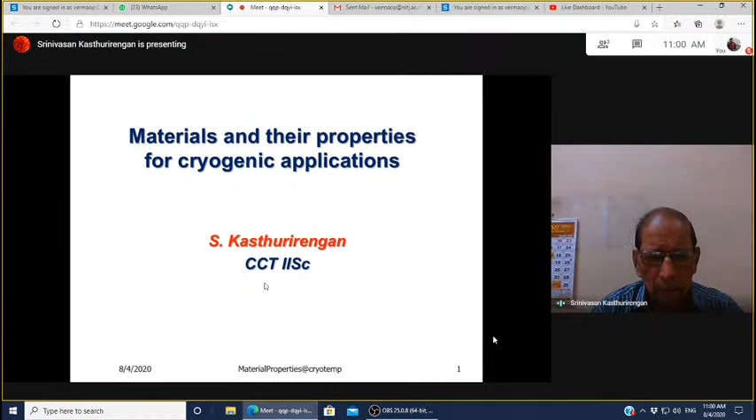Okay, thank you. I think yesterday we had a talk on the introduction to cryogenics, its fundamentals and applications. And today we are going to discuss the materials and their properties for cryogenic applications.

Like yesterday, the plan of my talk is something like this. There are a lot of materials used at room temperature. When you take them to cryogenic temperature, there are a lot of issues and they cannot be used, so we will see some of these issues. Then, which are the suitable materials for low temperature, and which are unsuitable? We will segregate this.

Then we'll move on to the properties of materials at cryogenic temperatures. We are aware of several properties, and the main important ones are thermal expansion, mechanical properties, and transport properties. In transport properties, we require to study specific heat, thermal conductivity, electrical conductivity or electrical resistance, and lastly, superconductivity.

The program being organized is on composites, and composites have a lot of applications in cryogenics. Please pardon me, I am totally new to composites, so please bear with me when I present that portion. But I would like to introduce a little bit about composites and their use in cryogenic applications. At the end of that, we'll conclude this talk.

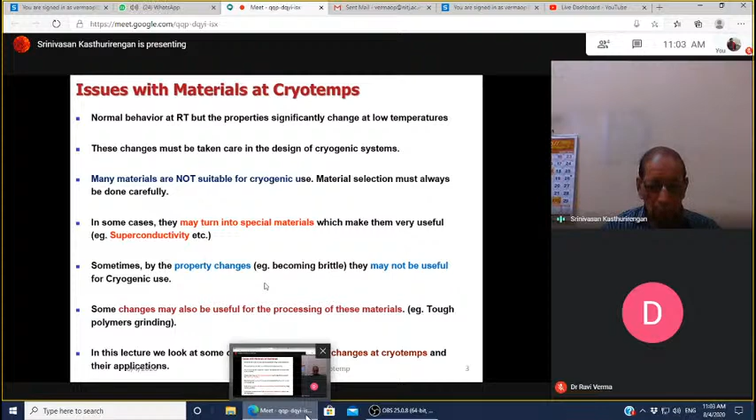Some changes of these materials themselves become useful for processing the materials. For example, if you take either rubber or tough polymers, you cannot grind them at room temperature. The only method is to use cryogenic grinding, cooling them to liquid temperature, then you can grind them without any problems.

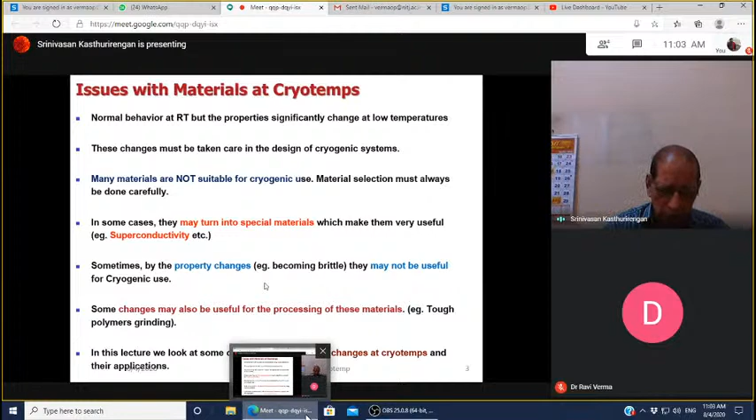So what we are going to do in this lecture is look at some of the material property changes at cryogenic temperatures and their applications. Okay, let us look at material selection at cryogenic temperatures.

Now, which are the suitable materials for cryogenic use? Let's see. For example, austenitic stainless steels, AISI 304, 304L, 316, 321, and low carbon type steels can be used. Aluminum alloys, for example 6061, 6063, 1100, etc. Copper is a very useful material for low temperature, especially for fabrication of heat exchangers.

There is also oxygen-free high-conductivity copper, called OFHC copper, used for very low temperature applications, particularly when you want minimal temperature gradients. You can also use phosphorus deoxidized brass. Niobium and titanium are also very frequently used. Titanium is a very tough, lightweight material, so it is used.

Niobium is used for superconducting RF systems. Niobium becomes brittle at cryogenic temperatures, but one has to design the system properly so that it doesn't become brittle.

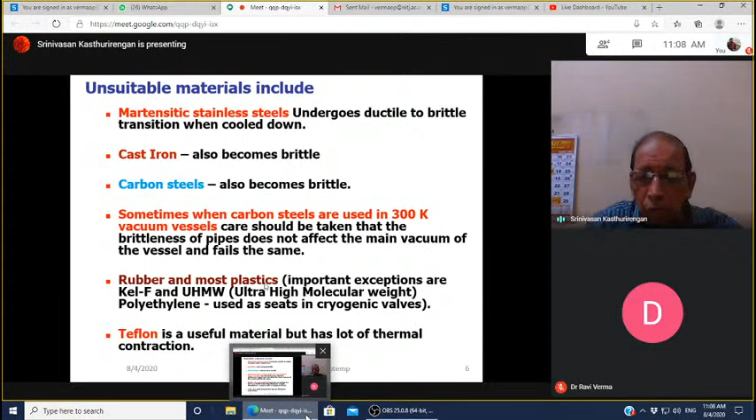Okay, let us go into the material properties at low temperatures. First we will start with thermal expansion. I will be using the terms thermal expansion and thermal contraction. Please remember thermal expansion takes place when a material is heated from low temperature to high temperature, and thermal contraction takes place when the material is cooled from room temperature to low temperature. So there will be some interchange of these terminologies, kindly bear with me.

Large thermal contraction can occur when materials are cooled to cryogenic temperatures. This leads to, for example, impact on the alignment. Suppose you have aligned some windows - if there is thermal contraction, the alignment may not be okay.

For example, including a simple transfer siphon, the inner part, if it contracts, then it goes away from the center of the tubes. So this has to be taken care. There will be development of interferences or gaps due to dissimilar materials. When you are actually fabricating, you should make sure that by the thermal contraction, they don't open up.

On the other hand, it should be the other way - it becomes closer in tolerances and causes a lot of increased strain, and sometimes it can fail. And sometimes it can also cause impact on the wiring.

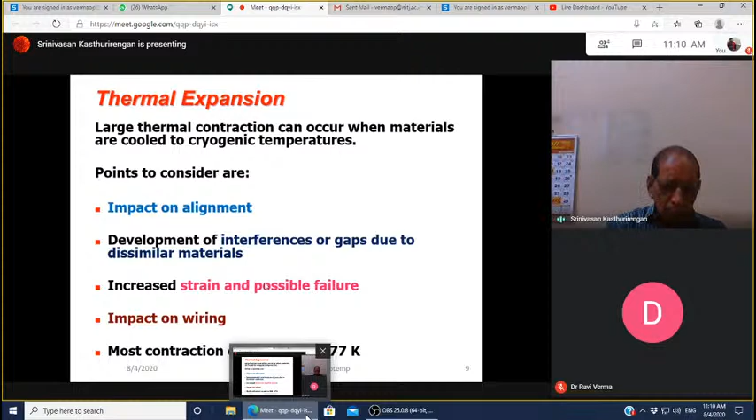Let us understand how the thermal expansion really takes place, or thermal contraction really takes place. Alpha is actually the thermal expansion coefficient, which is denoted as 1 by L into delta L by delta T. L is the length of the material, delta L the change in the length for a given change in temperature. Delta L by delta T refers to that.

Now, thermal expansion is caused because of the following reason. Suppose you imagine a well-arranged atomic structure - for example, let's say we'll think of a metal. All the atoms are arranged very nicely, at periodic, there is a very good periodicity of the alignment of atoms. Let's consider only two atoms which are very close by.

Let's look at this, for example. This is at a very low temperature. Here we are moving it further. At low temperature, the atoms do not vibrate about the mean position, or the vibration amplitude is extremely small. Then as you keep increasing the temperature, the atoms vibrate in their mean position. But what happens is, because of the anharmonic component of the potential, the distance between the atoms keeps moving out. So there is an expansion taking place.

So at higher temperature, there is a large amplitude of the oscillation of the atom in its position. Also, the distance between the atoms are increased. So this is the real cause for thermal expansion in materials.

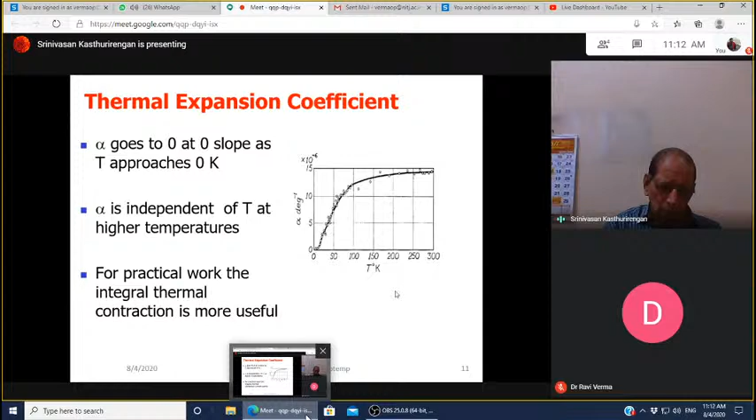Let's proceed. The thermal expansion coefficient itself goes to zero at zero slope as the temperature approaches 0 Kelvin. Actually, the thermal expansion coefficient is independent of temperature at high temperature. You can see the graph on the screen, which shows the thermal expansion coefficient is nearly constant at high temperatures. Now, for actual practical work on the cryogenic temperature range, what we need is the integral thermal contraction or integral thermal expansion coefficient.

Let's look at the integral thermal contraction for different materials. The delta L by L from 300K to 100K in the first column, and then delta L by L from 100K to 4K in the second column. So different materials' values have been chosen here - for example, stainless steel and copper, aluminum, iron, invar, brass, epoxy, and titanium, etc.

What you notice is, for example, stainless steel has a thermal expansion coefficient of 296 into 10 to the power minus 5 in the range from 300K to 100K, whereas it's just about 35 into 10 to the minus 5 in the range from 100K to 4K. Similarly, most of the materials have the same behavior.

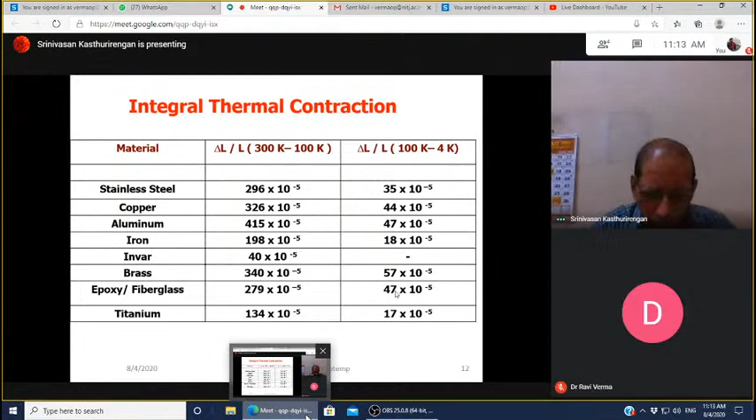Now, you may remember yesterday that we showed a video in our first talk relating to shrink fitting. Actually, the thermal contraction becomes very useful for making a proper joining between two dissimilar materials. For example, you can think of joining brass with copper, or aluminum with brass, and things like that. Yesterday on the video, we saw an aluminum stud inserted into a brass hole.

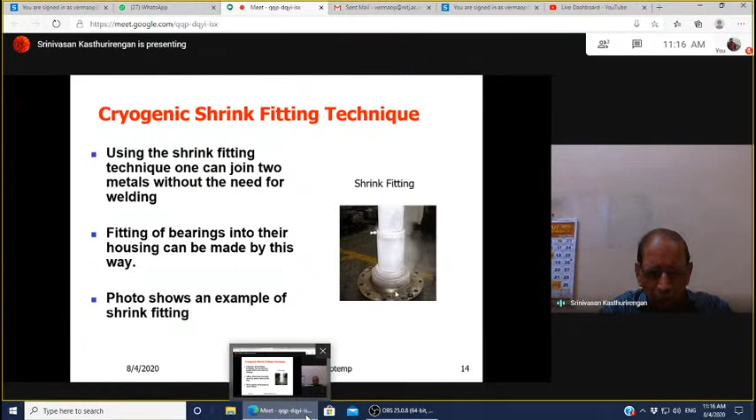The photograph on the screen shows an example of a shrink fitting. The two components are being fitted there.

Now let's move on to the mechanical properties at cryogenic temperatures. In mechanical property, we'll talk about material strength, Young's modulus, etc., or fatigue strength.

Let us look at the material strength. The material strength tends to increase at low temperature as long as there is no ductile to brittle transition.

The 300K values are typically used for conservative design, because as you make the system work at low temperature, the performance of the system will be better. So we may have all the data available up to 77K, but if you want to go to 4 Kelvin, there is limited data available. One has to look for literature values, or in case you are using a new material, it has to be tested.

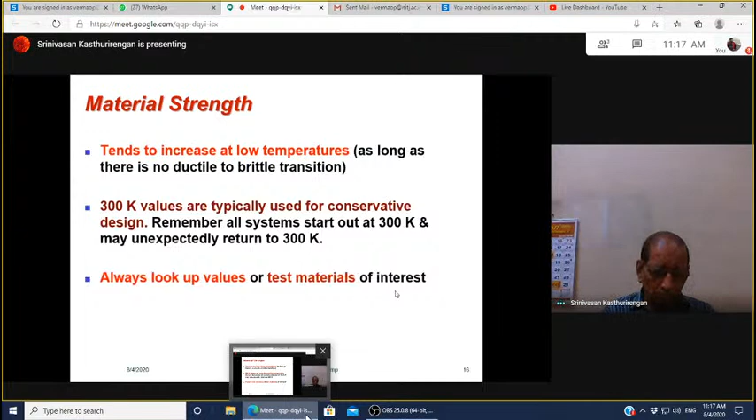Now let's see the yield strength. The yield strength of materials increases on lowering the temperature. Metals have higher yield strength compared to non-metals.

Let's look at the ductility of the materials. Most materials, the ductility decreases with decreasing temperature. As you go lower in temperature, ductility reduces.

Carbon steel, as shown in number 6 in the graph, has a ductile to brittle transition around 100K, because of which the material becomes brittle at low temperature. So carbon steels are not suitable for low temperature uses.

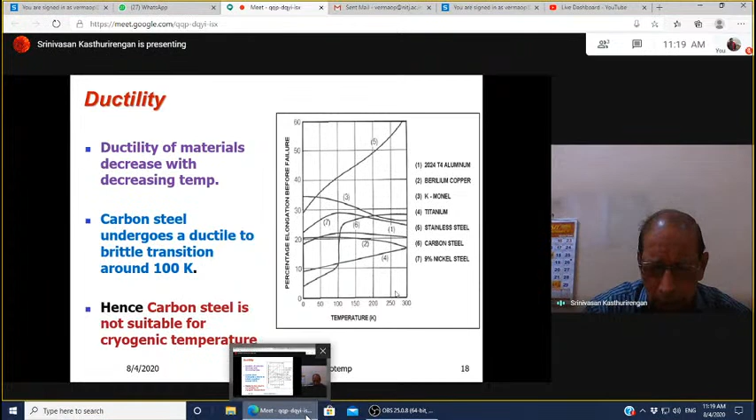What about the fatigue strength of materials? Fatigue strength is the stress required for failure after a certain number of cycles on a given material. In general, the fatigue strength increases on decreasing the temperature.

So what you see is, for example, the fatigue strength at 10 to the power 6 cycles has been plotted in your graphs for materials like aluminum, beryllium copper, monel, titanium, stainless steel and carbon steel, etc. You see number 5, stainless steel, has got fairly high fatigue strength values compared to the others.

Of course, most materials show an increase in fatigue strength. Aluminum, however, shows a decrease below about 150 Kelvin.

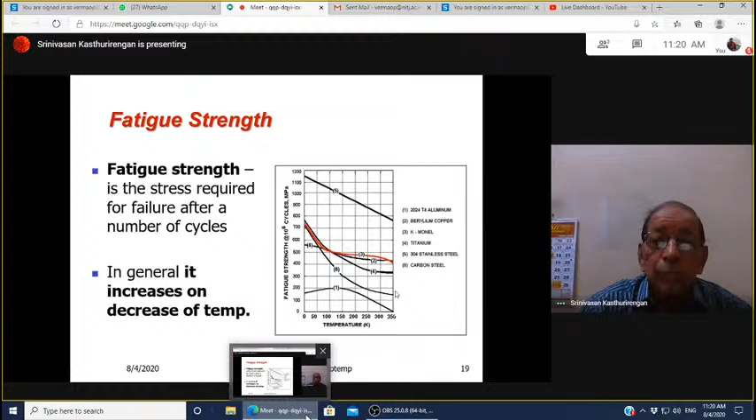Now there is a process called cryogenic treatment, which can be used on metals. This process modifies the microstructure of materials to enhance their performance. Normally, when steels are made, you have a heat treatment.

After heat treatment, the steels are left with a certain percentage of austenite which is not fully transformed to martensite. This is known as retained austenite, or RA. The cryogenic treatment transforms the retained austenite into martensite, which is the desirable condition, since that's what 90% of the steel already is. By the cryogenic treatment, the voids and imperfections in the steel structure get eliminated.

I am very glad to say that our cryogenic technology group has developed the cryogenic treatment setup. Professor Durgesh Nadig will be making a presentation, and I hope he will be sharing some information about it.

The cryogenic treatment enables a gradual cooling of the sample from room temperature to low temperature, then maintaining the sample at the low temperature, which is called soaking, and then warming it back to room temperature. The details of the experimental setup and some studies are shown in the next few slides.

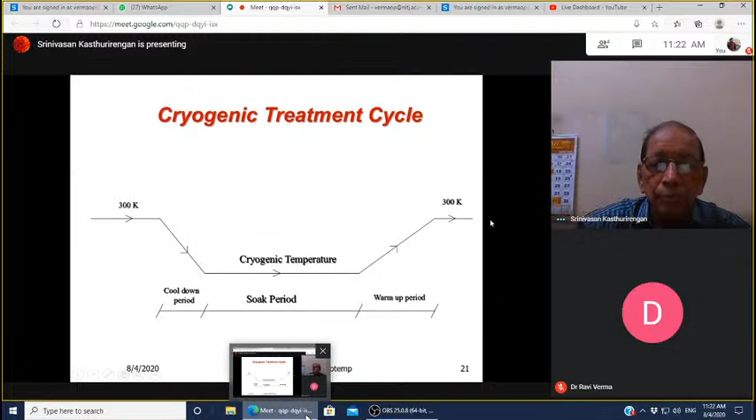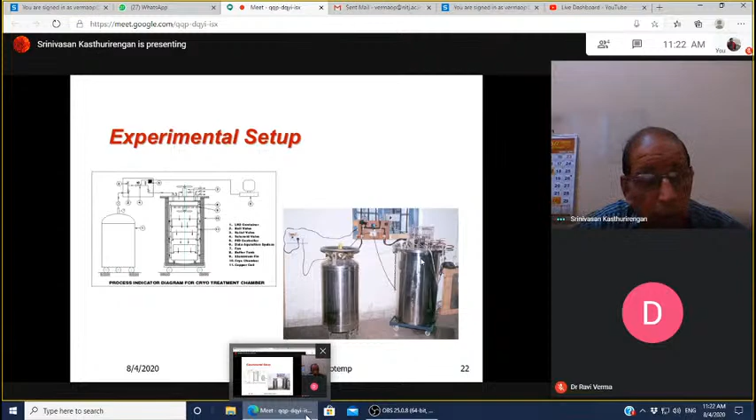This is the experimental setup which Professor Nadig has set up. You can see the actual experimental system, and here you have a schematic view. This is a cryogenic tank which supplies liquid nitrogen to the inside of this vessel, where all the material to be cryogenically treated is placed. Nitrogen vapor at different temperatures is allowed to enter this zone, gradually cooling the samples from room temperature to low temperature, then maintaining it at a particular temperature. If you stop the liquid nitrogen flow, the material is warmed back up to room temperature.

By this cryogenic treatment, tool steels, for example, have improved their performance. Some results are shown here. For example, the wear in microns for an untreated tool is about 88. When you cryogenically treat it, the value goes down to 59, meaning the tool is now better. So there is a performance improvement of almost 33%.

The frictional force in newtons for an untreated tool is 10.5, whereas for a cryotreated tool it is 7.4, a percentage improvement of about 30%. So cryogenic treatment not only improves the microstructure, it also introduces dimensional stability to the material through this process.

ISRO has been one of the important customers for this type of cryogenic treatment. There are pressure transducers with diaphragms which are cryogenically treated and then used in their systems.

Let's look at the thermal properties. We said thermal property, so we'll start with heat capacity, or specific heat. We know the specific heat of a material, or heat capacity, is the change in internal energy to the change in temperature, dU/dT, or we can also write it as Q divided by mass into change in temperature.

In general, at cryogenic temperatures, Cp, the specific heat, decreases rapidly with decreasing temperature. So how does this modify the system? If you look at cryogenic conditions, the system's cool-down will be faster as it gets colder, meaning as you go to lower and lower temperatures, the cooling of the system will be quite fast.

At cryogenic temperatures, small heat leaks introduced into the system, or an applied heat load, cause a large temperature rise because the specific heat is low. So the temperature rise will be higher for a given heat load. Where is this heat content stored in the material? It is stored in lattice vibrations, and in electrons in the case of metals.

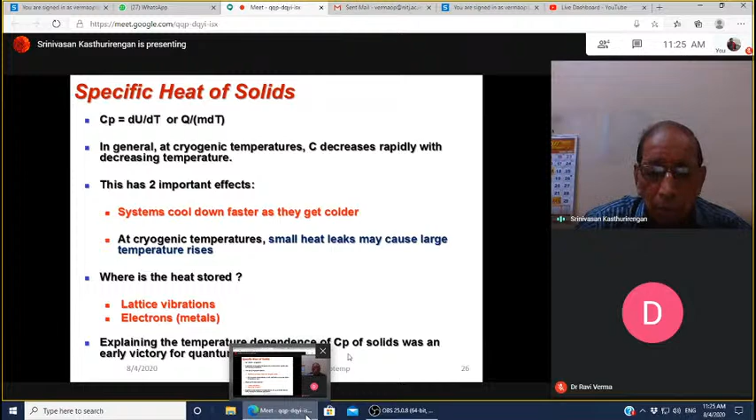Explanation of the temperature-dependent specific heat in solids is one of the important early victories for quantum mechanics.

What the Dulong-Petit law tells us is that energy is stored in a three-dimensional object, which we can call a three-dimensional oscillator, a perfect arrangement of atoms in 3 dimensions. That's equal to 3 times NkT, which is also equal to 3 times R times... R is the gas constant, k is the Boltzmann constant, N is the Avogadro number. So if you calculate the specific heat from this expression, you find specific heat is equal to 3R, 3 times the universal gas constant.

Actually, this is okay at 300 K for most materials, but it does not take into account quantum effects. So Einstein proposed a theory wherein he said the atoms are only able to vibrate at quantized frequencies - you cannot have all different frequencies, but only certain special frequencies of vibration.

So your internal energy now has to be calculated using this new formula, n plus half into h nu. This leads to a temperature dependence of the specific heat.

This was further modified by Debye using the Debye theory, which says the atoms in a solid are not independent units, they are all coupled together. The coupled motion of these atoms are called phonons, and these phonons can have only certain frequencies, not all different frequencies.

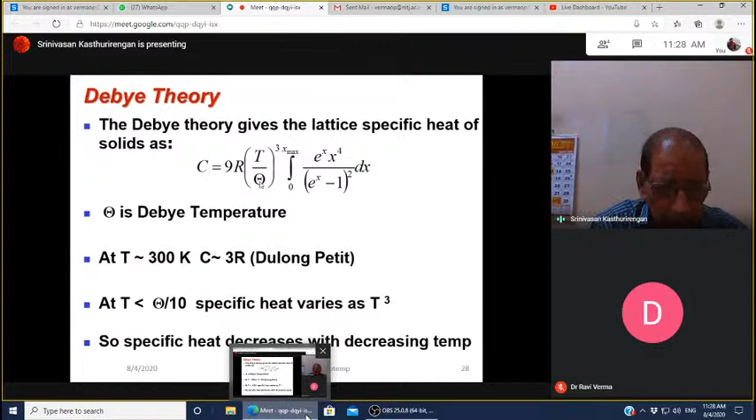What about the electronic contribution to specific heat? Thermal energy is also stored in free electrons in the metal.

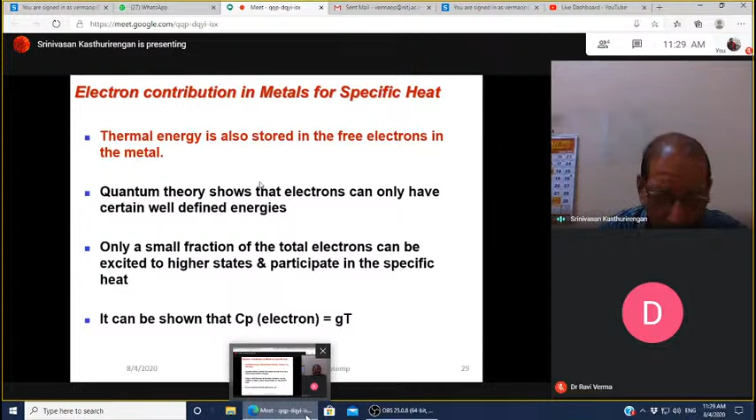Quantum theory shows that electrons have only certain well-defined energies. For example, if you have a conduction band and valence band, some specific energies are there. Only a small fraction of the total electrons can be excited to higher states, and they participate in the specific heat. It can be shown that the electronic specific heat equals some constant multiplied by temperature, in other words it varies linearly with temperature.

So now we have a lattice contribution and an electronic contribution. If you look at the specific heat in total, it becomes C equals A T cube plus B into T. The contribution of the electrons becomes important only at temperatures less than 4 Kelvin. So this is how the specific heat behaves at low temperatures.

There are paramagnetic materials and other special materials. They may have anomalous specific heats, meaning specific heat can vary randomly. For example, you could see some peaks etc. But this is because of certain transitions which may be taking place in these materials.

Now let's look at the specific heats of common metals. On your right hand side, you see specific heats given for stainless steel, brass, Monel, and aluminum. You can see the specific heat variation. At room temperature you may have a constant value, or at higher temperatures it may be nearly the Dulong-Petit value, and gradually as temperature decreases, specific heat decreases with decreasing temperatures.

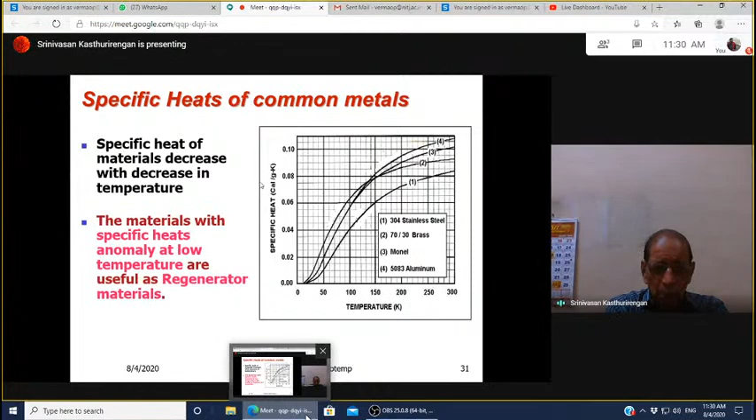So materials with specific heat anomaly become useful as regenerator materials. Let's look at that. For example, if you take materials like erbium-3 nickel or holmium copper etc., they have magnetic transitions.

Now these magnetic materials, you can see the specific heat plotted here compared to that of lead. Lead is, of course, going down, but there is no peak in lead. Whereas if you look at the other materials, there is a peak in the specific heat at low temperatures. These specific heats increase at low temperature because of the magnetic transitions in these materials.

In fact, for cryocoolers, which is one of the important workhorses at cryogenic temperatures, these serve as regenerator materials because the heat content can be stored in these materials since the specific heat is high. So cryogenic refrigerators or cryocoolers use these special materials for storage of heat content into their body.

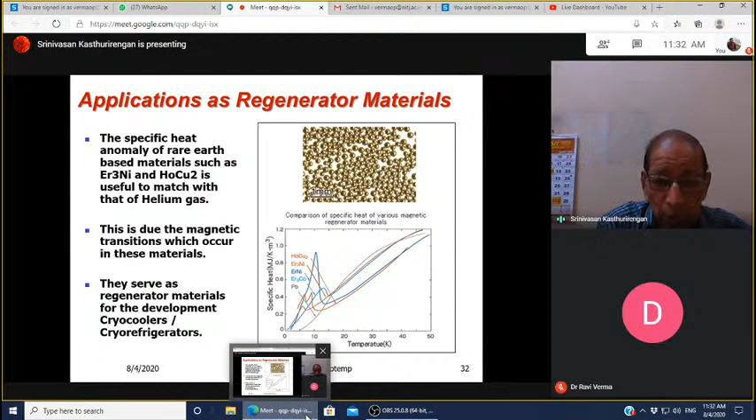There are a lot of applications related to that. Yesterday we saw the cryocoolers, GM cryocooler or pulse tube cryocooler etc. These cryocoolers use some of these materials at extremely low temperatures as regenerator materials, so they are able to produce very low temperatures like close to about 2.5 Kelvin and so on.

Now let's move on to the thermal conductivity of solids. We know the standard expression for thermal conductivity: Q is equal to minus thermal conductivity K into area of cross section of the material into dT by dx, which is the gradient of temperature across the material.

Now you notice that K is actually a function of temperature, K significantly varies with temperature. So obviously, when you want to calculate the heat transfer, you need to consider the variation of thermal conductivity with temperature for the particular material.

Let us look at thermal conductivity of metals. We mentioned earlier about the specific heat. Even for thermal conductivity, energy gets transferred both by lattice vibrations and conduction electrons. For metals, there are two scattering mechanisms for the conduction electrons, and we are only looking at the electron, for example.

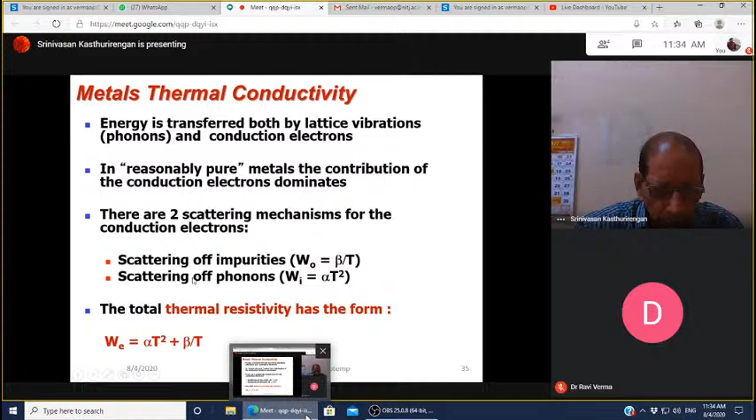The scattering of the conduction electrons can happen either by impurities or by phonons. The resistivity belonging to scattering by impurities is W0 equal to beta by T. Scattering by phonons is proportional to T square, so the thermal resistivity is proportional to T square. Thus the electronic thermal resistivity has the form WE equal to alpha T square plus beta by T.

Now, conductance is the inverse of resistivity, so with K being 1 by WE, you can look at the thermal conductivity of metals by the electrons. On the left side, you have a plot of WE as a function of temperature. The dotted curve gradually going down is due to impurity scattering, and the lattice scattering gradually picks up and rises to higher values. Combining these two, you get a curve that goes like this and then gradually increases.

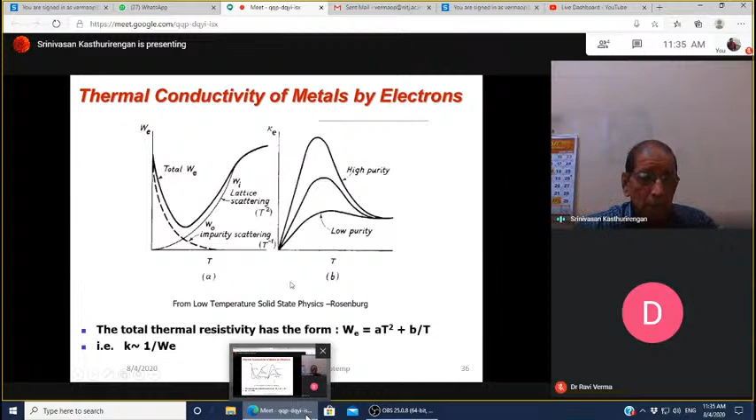This is thermal resistivity. Now if you look at the conductivity, it is 1 by this value. On the right-hand side graph, for high purity material, you can see a sharp rise and then it goes down. For low purity material, the peak is somewhat lower. This explains the behavior of thermal conductivity of metals as a function of temperature.

There is another heat transfer mechanism by lattice vibrations and phonons. This thermal resistance value is something like W equal to A by T square. But normally one neglects the phonon heat transfer in metals, because conduction electron heat transfer dominates, so you neglect this.

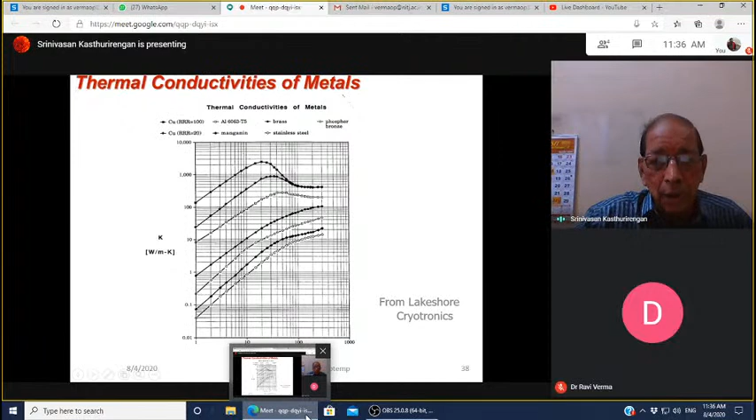Now let's look at the thermal conductivity of various metals: copper, aluminum, brass, phosphor bronze, and stainless steel, etc. You can see the behavior of these materials - they have a nearly constant value at room temperature and then gradually go down. The plot is given on a log graph, with the Y-axis in watts per meter Kelvin and the X-axis in temperature, both on logarithmic scale.

Thermal conductivity integrals are normally considered for making calculations, because we know the thermal conductivity depends on temperature, so heat transfer calculations become rather difficult if done directly. So we make use of thermal conductivity integrals. The heat conduction can be written as Q equal to minus G into theta 2 minus theta 1, where theta is the thermal conductivity integral, theta I equal to integral from 0 to Ti of the thermal conductivity value multiplied by the temperature change.

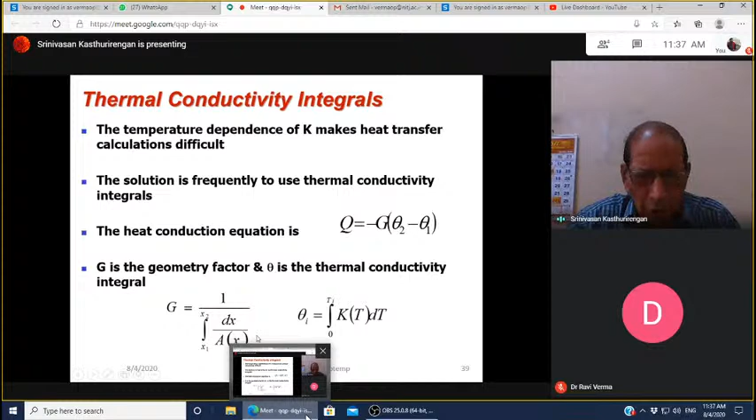This is the thermal conductivity integral term. The factor G is a geometrical factor, G equal to 1 by integral from x1 to x2 of dx divided by A, where x is the material length from one position to another and A is the area of cross section.

What about thermal conductivity integrals for metals and non-metals? Non-metals also behave very similar to metals - the thermal conductivity integral drops, but the values are somewhat lower compared to metals. You can see data for G10, quartz, stainless steel, nylon, and some other materials shown in this graph.

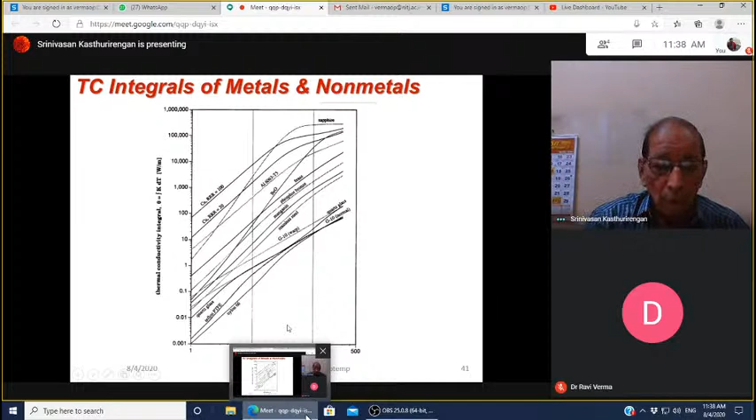Let's move on to the electrical properties.

Electrical resistivity is normally considered because the flow of current is impeded by the electrical resistance of the material. Ohm's law tells us that the voltage developed across a conductor depends on the resistance multiplied by the current flow. The resistance value R is equal to rho multiplied by L divided by A.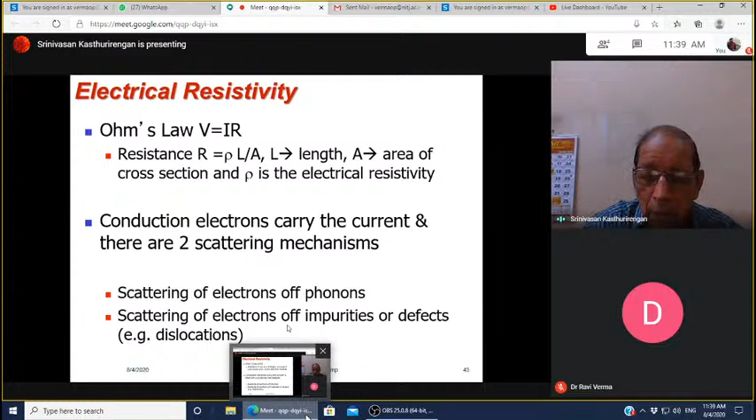Rho is the electrical resistivity, L is the length of the material, A is the area of cross section. We are concerned only about rho at this point, because we will look at how exactly rho varies with temperature. In a metal, conduction electrons carry the current, and there are two scattering mechanisms: scattering of electrons by phonons, and scattering of electrons by impurities, defects, or dislocations.

Now let's look at the electrical resistivity of metals. When temperatures are of the order of the Debye temperature, phonon scattering dominates, and resistivity is proportional to temperature. At temperatures much less than the Debye temperature, impurity scattering dominates, and rho is more or less constant because the number of impurities in the system is constant. In between the two regions, around Debye temperature divided by 3, rho is proportional to T to the power 5 for metals.

For metals with purity, especially copper for example, there is a term called RRR, the residual resistivity ratio, which is the resistance at 300 K divided by the resistance at 4.2 K. It indicates the material purity. If the number is very large, the material is quite pure.

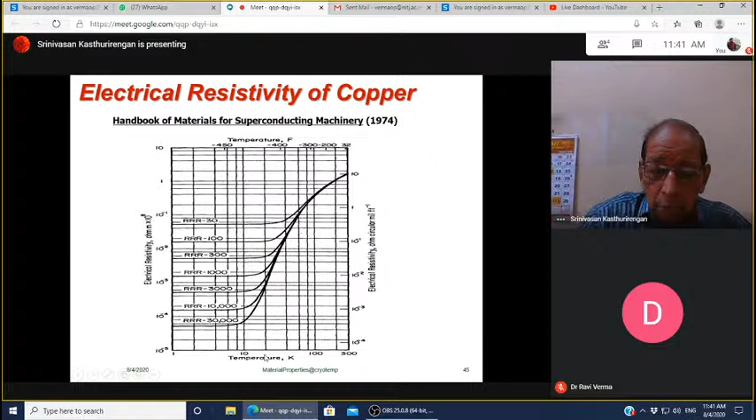What about other materials like platinum? In a metal like platinum, resistance decreases with decreasing temperature, and as with copper, it becomes constant because of impurities at low temperature. The main application of platinum is as a resistance thermometer, a temperature sensor for cryogenic temperatures, useful down to about 30 Kelvin, and fairly linear at higher temperatures. So you can think of digital thermometers based on platinum resistance.

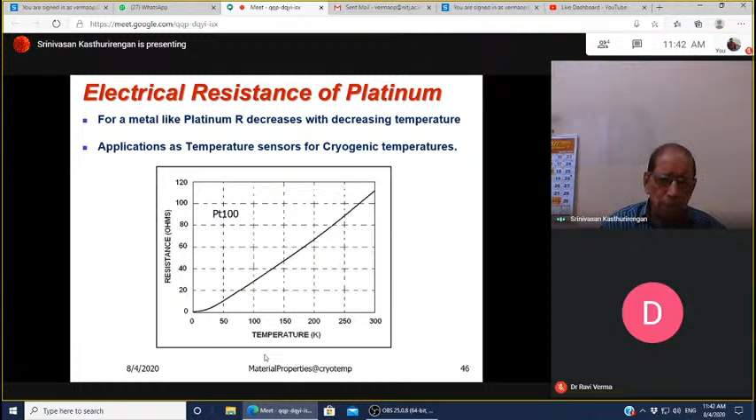Now we are going to move on to the concept of superconductivity. We discussed this yesterday, but I would like to show a little more detail, because this is one of the important properties of materials at low temperatures. In some metals and alloys, the electrical resistance decreases with temperature and finally drops to zero, unlike copper which we discussed earlier. Such a material is known as a superconductor.

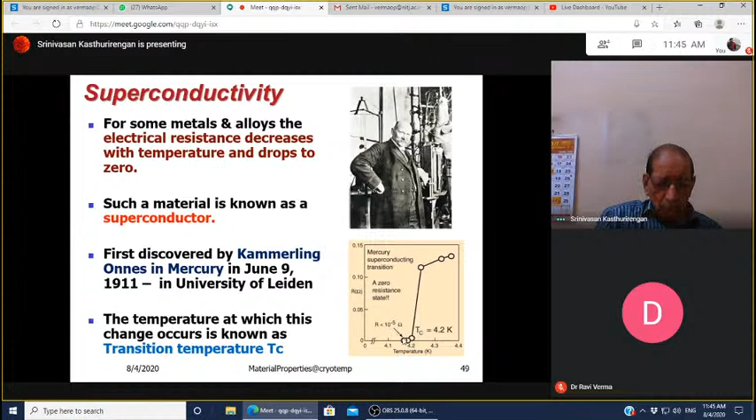The temperature at which the resistance suddenly drops from a high value to zero is known as the transition temperature. This temperature is also known as the critical temperature.

Let's look at some of the conditions for superconductivity. Critical temperature is that temperature below which the material is superconducting. Above this temperature, the material is normal, having the properties of a normal conductor. In fact, not all materials become superconductors.

Superconductivity is also followed by diamagnetism, and therefore superconductors are perfect diamagnets, which means they expel all the magnetic field, which is called the Meissner effect. If the externally applied magnetic field exceeds a critical value, the superconductor will revert back to the normal state, in other words, superconductivity will be lost.

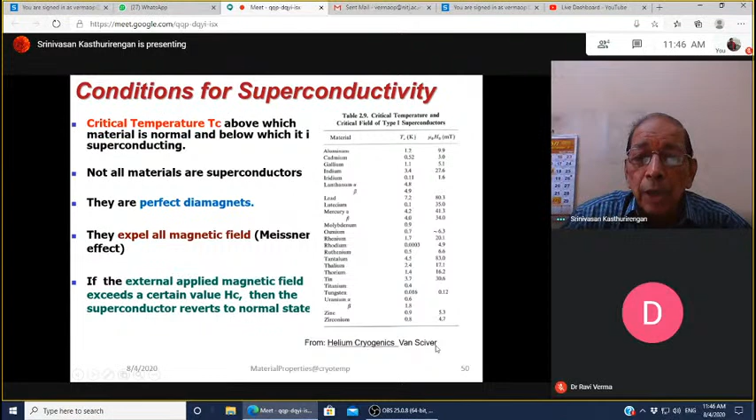You have a table on your screen which shows different materials and their superconducting temperatures, and also the sort of fields that can be produced using them.

There is a third parameter. We have talked about critical temperature, and then the critical field. Now we are also going to talk about a third parameter in superconductivity called the critical current. If the critical current exceeds a certain value in a superconductor, the superconductivity breaks down.

This critical current is normally called current density, expressed in terms of critical current density, or JC. So you have three parameters: critical temperature, critical field, and critical current. All these values have to be below a certain value so that the material becomes a superconductor. When the material crosses any one of these boundaries, the material becomes normal.

The material going normal is called quenching, and this is generally what we see in the quenches of magnets, etc.

There are other types of superconductors. There are two types, type 1 and type 2. The type 2 superconductor has two critical fields: a lower critical field and an upper critical field. The lower critical field is called Hc1, and the upper critical field is called Hc2.

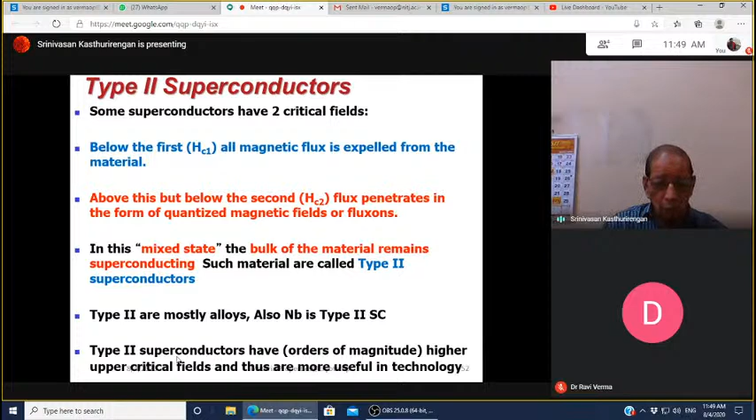Niobium is one of the exceptions, it's a type 2 superconductor. The advantage of type 2 superconductors is that they have very large upper critical fields, making them very useful for superconductivity technology.

I'll show you one example here: the Large Hadron Collider, LHC, niobium titanium wire, courtesy of L. Botturra of CERN. You can see here a three-dimensional figure in which you have temperature on one axis, and on the other axis the magnetic field.

On the vertical axis you have the critical current, and you see a shape below which superconductivity exists. When the material crosses above this curve, outside it, the material is no longer superconducting. The critical current JC, for example, at 5 Tesla and 4.2 Kelvin, is approximately 3000 amperes per square millimeter.

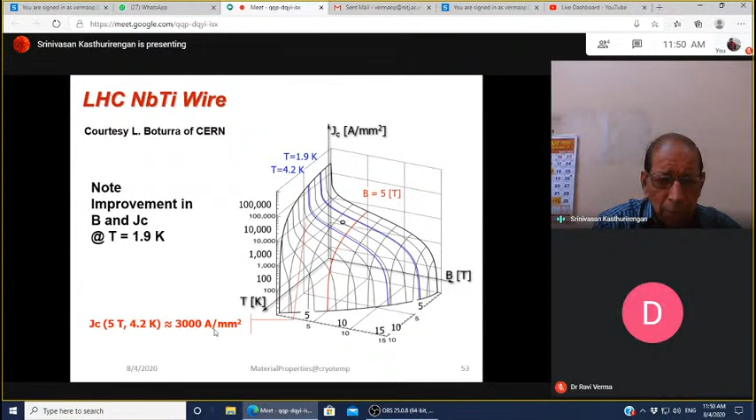Now superconductivity has created more boundaries than before. We now have what are called low and high temperature superconductors. Materials with critical temperature below 25 K are called low TC superconductors. Some known materials are niobium, titanium, niobium titanium, or niobium-3-tin, etc. But to reach such low temperatures, you require liquid helium as a coolant.

There are also oxide-based superconductors, discovered in 1986, like yttrium barium copper oxide, etc. Bednorz and Muller discovered superconductivity in oxide materials. They have TC values much higher, close to 100 or 110. Because of this, they can be made superconducting using liquid nitrogen.

You remember yesterday we showed a video of yttrium barium copper oxide, a superconducting material, which had become a superconductor using liquid nitrogen. Superconductivity is also followed by the Meissner effect, because of which only the magnet could float on the surface. That is the expulsion of the magnetic field by the superconductor, the material becoming a diamagnet.

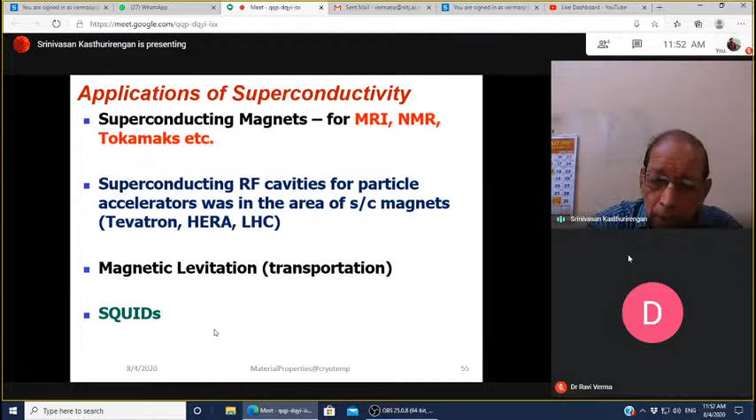Then there is another area called magnetic levitation for transportation purposes. Then superconducting quantum interference devices, called SQUIDs, useful for medical applications. We'll see about that.

When we want to make large magnets, you require large lengths of superconducting wires. High field magnets for MRI, NMR, etc. have to be prepared using large lengths of superconducting wires. Even today, people are fabricating these magnets with low Tc materials.

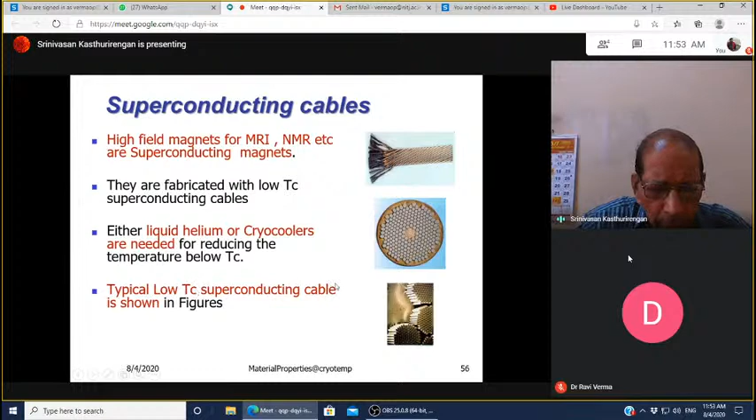A cross-section of the superconductor is shown here. There are a large number of strands of superconductors. The superconductor is actually embedded in a copper matrix, because there will be a lot of heat dissipation, so in case of a quench, it will be able to take care of that. If you take one of the strands and a cross section, it will look like this, and if you look closer, it will look like this. Now the typical low Tc superconductor cable is what you have seen in these figures.

These magnets use liquid helium as a coolant. Sometimes one uses liquid helium cryostats along with helium recondensation based on cryocoolers. Nowadays there are systems called dry magnet systems coming up, and they use cryocoolers directly. You start at room temperature, use a cryocooler, and gradually cool the system to the temperature at which you can convert it into a superconducting magnet. So they do not use liquid helium, and therefore such a system is called a dry magnet system.

I mentioned the application of superconducting RF cavities for particle accelerators, SRF cavities, normally made of niobium. It has a vacuum inside called the beam vacuum, which is separate from the insulation vacuum. These cavities are normally surrounded by a bath of liquid helium. There are several geometries; they are designed in different geometries, but the typical geometry is the elliptical shape. They are operable at different frequency ranges from 80 megahertz to almost 3.9 gigahertz. A typical ILC cavity of 1.3 gigahertz, 1 meter long, is shown on the screen here.

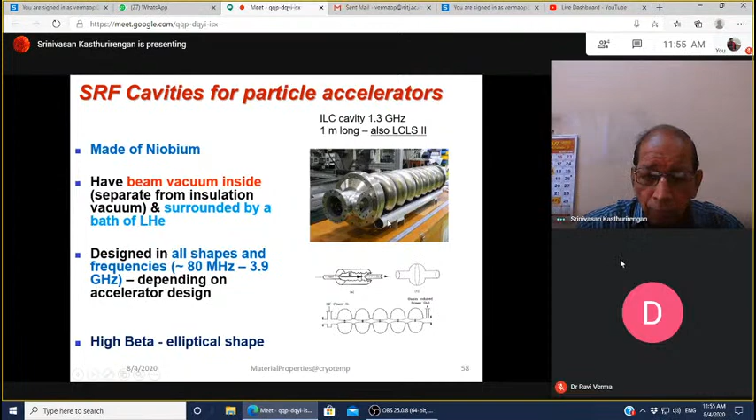What about magnetic levitation? I don't want to play the video, but yesterday you have seen the magnetic levitation. The magnetic levitation is because of the Meissner effect. There is the magnetic field; the material becomes a diamagnet, does not allow the magnetic field to penetrate, because of which the magnet on top floats. So that means you can have a separation between the superconducting material and the normal material and a magnet, and therefore the so-called friction between the two materials is totally avoided.

This is what is called magnetic levitation, useful for creating trains, transport arrangements which can go very fast, extremely fast, high speeds. You can move with these types of magnets. Normally, it is not necessary to use low temperature or superconductivity for magnetic levitation; you can also use normal electromagnets, because like poles repel and unlike poles attract. So you can also use electromagnets as well in the case of magnetic levitation.

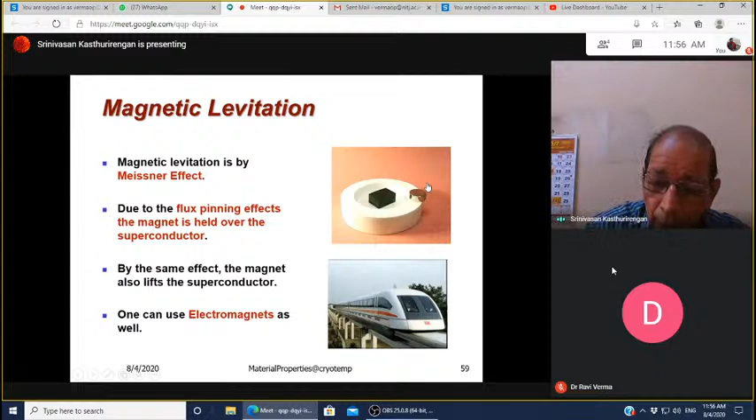What about SQUIDs? As I mentioned, SQUIDs are nothing but superconducting quantum interference devices. There are two superconductors separated by an oxide layer. Due to the effects of tunneling, the Cooper pairs cross the junction, and by this process the flux is quantized, and therefore they can generate signals. You can use them for measurement of electrical signals related to extremely small magnetic fields, using the flux quantum to measure electrical signals. The medical area is called magnetoencephalography, which monitors the signals from the brain.

I understand that NIMHANS in Bangalore, along with IGCAR Kalpakkam, have been developing these squid-based systems for measurement of brain signals, and they have many ongoing projects on this.

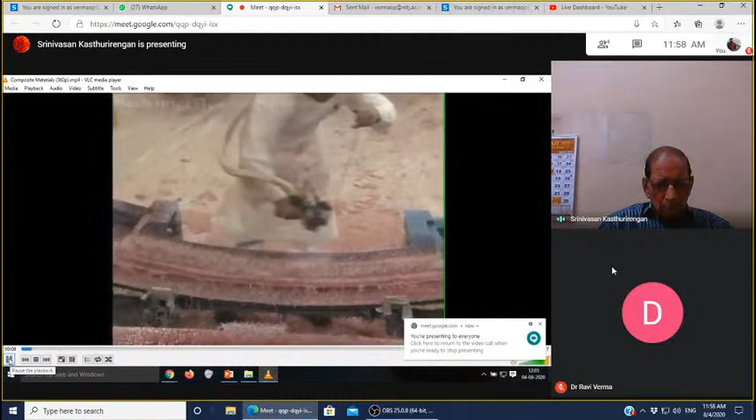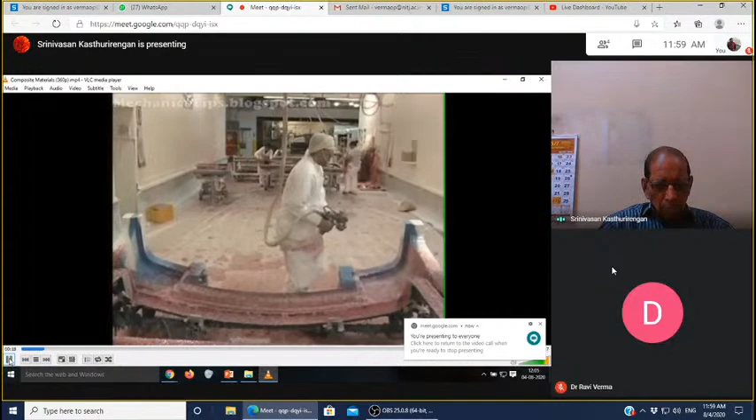Composites are made up of at least two distinct intended materials, which together improve product performance and/or lower manufacturing costs. Many materials routinely designated by other terms are also considered composites, including plated, clad, or coated metals.

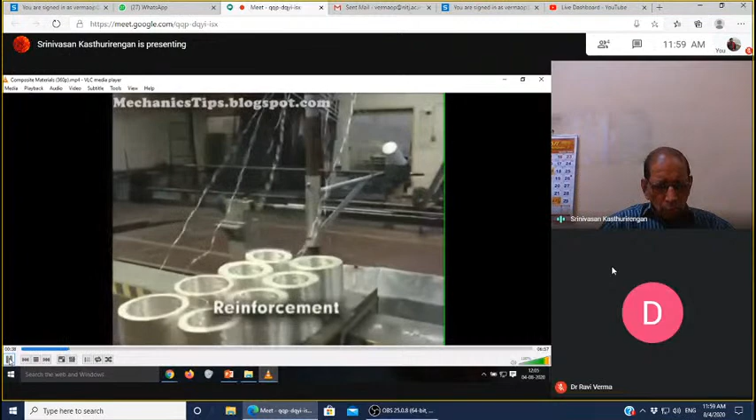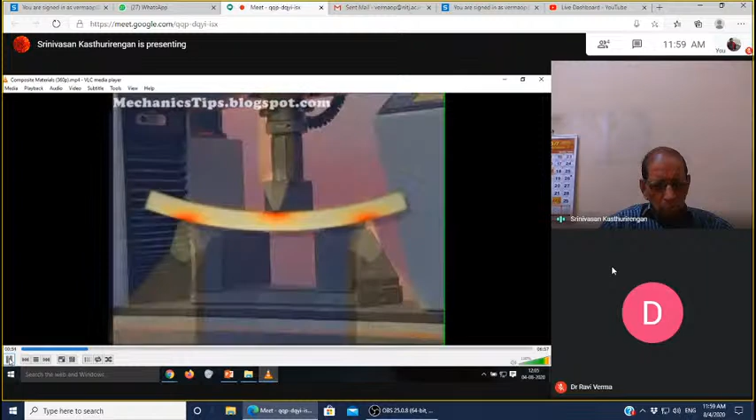The term composite has come to mean a material consisting of a matrix or base material and a reinforcement material. The matrix functions as a binder for the reinforcement and controls the physical shape and dimensions of the part. The primary purpose of the matrix is to transfer the load or stress applied to the composite to the reinforcement. The matrix also protects the reinforcement from adverse environmental effects.

The reinforcement's function is to improve the mechanical properties of the composite and is typically the main load-bearing element. Reinforcement is usually in the form of fibers or particles.

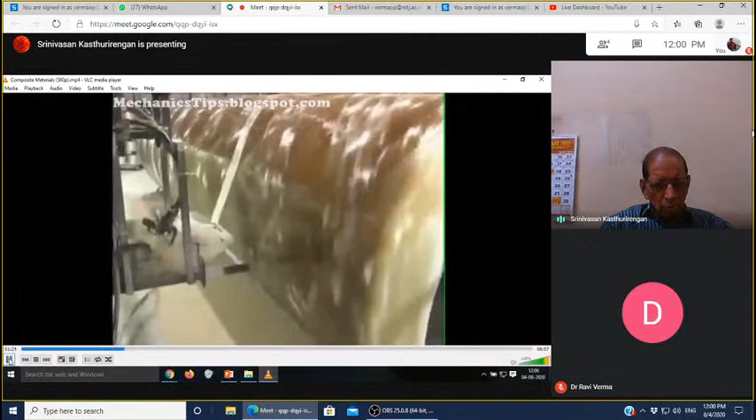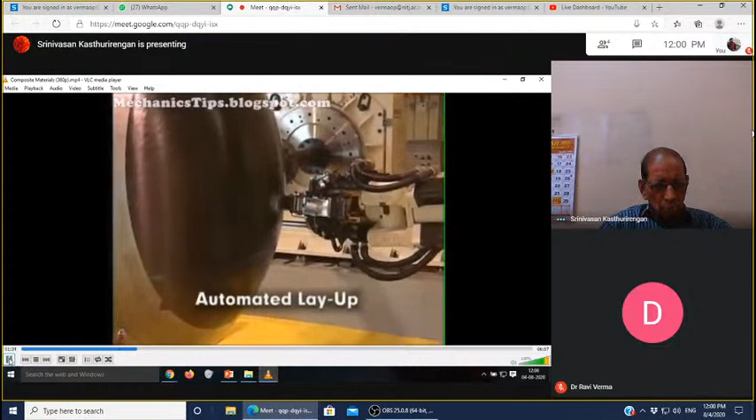There are numerous methods of producing parts from fiber-reinforced thermoset polymers, with the primary types being manual layup, automated layup, spray up, filament winding, pultrusion, and resin transfer molding.

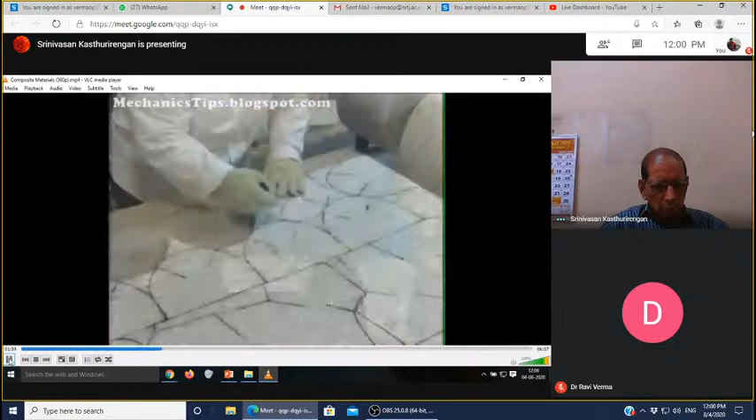Manual layup is a widely used method of manufacturing a wide range of composite parts and components. The process begins with cutting the reinforcement material to size. This may be performed using knives, scissors, disc cutters, power shears, rotary power cutters, saws, or lasers.

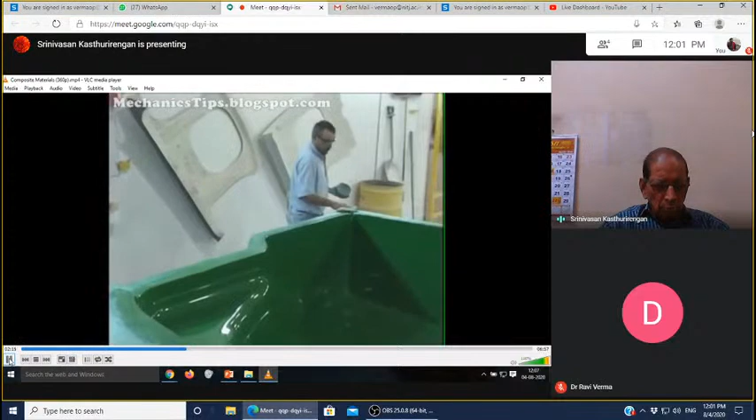A mold having the desired part shape is then coated with a release agent to permit subsequent part release. Composite manufacturing molds are commonly made of steel, aluminum, nickel, copper, or polymer matrix composites.

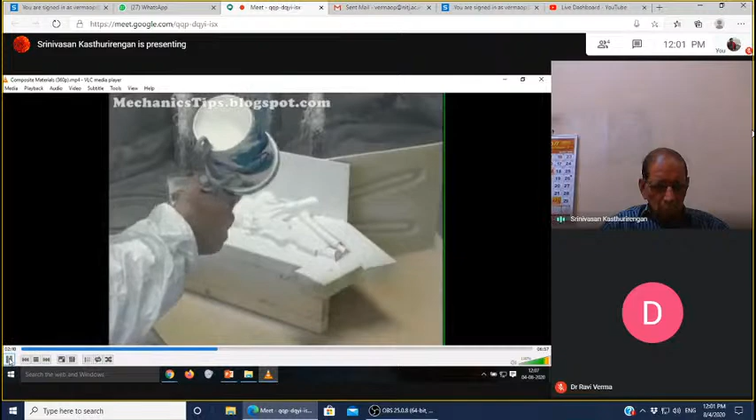Once coated with a release agent, a layer of resin called a gel coat may be applied to the mold and allowed to cure to a tacky state. As the gel coat cures, the reinforcement material is prepared for application by impregnation with wet resin or matrix material.

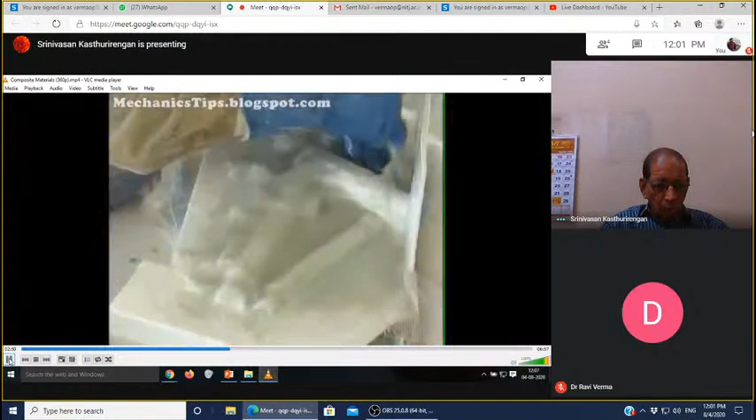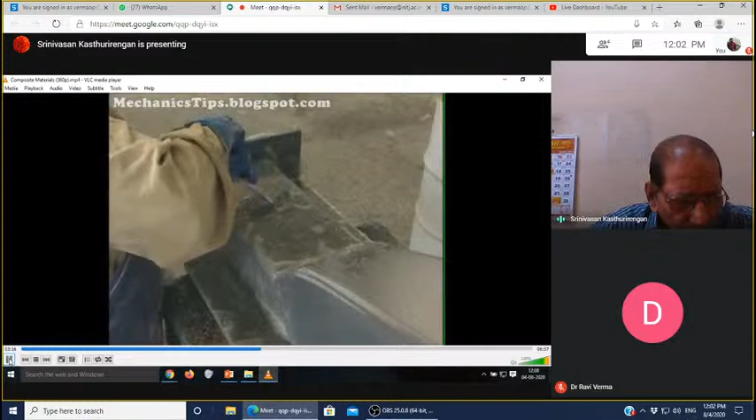The impregnated reinforcement material is then placed on the coated mold surface and hand-rolled for uniform distribution and removal of entrapped air. More reinforcement material and resin are applied as needed until the required part thickness has been built up. This so-called wet layup method can be used with nearly all reinforcement materials and is widely used to produce glass-reinforced polyester products and sometimes glass-reinforced epoxy products.

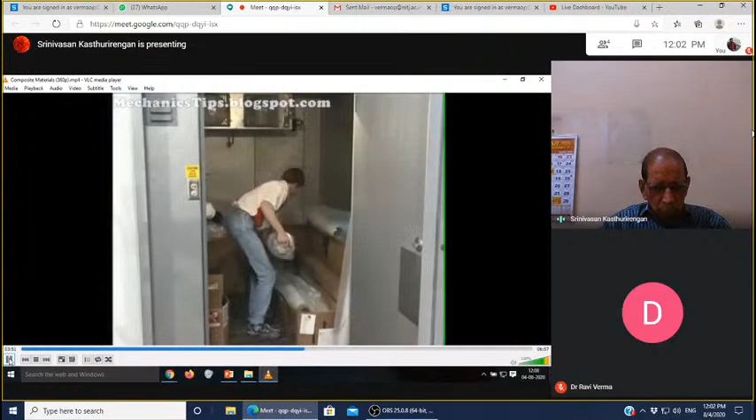Wet layup is also used for making composite molds. Layup can also be performed using prepreg material. Use of prepreg eliminates separate handling of the reinforcement and resin. Prepreg reduces resin consumption and can improve part quality by providing more consistent control of reinforcement and resin contents. However, prepreg must be kept in refrigerated storage until use time to prevent pre-curing.

Composites are made up of at least two distinct intended materials: a matrix or base material.

I think we'll move back to our presentation. We have heard something about composites now. Okay, composites and cryogenics - this video we have just seen.

So what we have seen is the material created with fiber reinforcement and a resin matrix material. The constituents retain their identities but act in total. Fiber generally refers to filamentary materials. There are several types of fibers used: E-glass fibers, S-glass, Kevlar 49, alumina, and carbon fibers of different types.

Epoxy resin generally refers to a broad range of epichlorohydrin-based resins, catalysts, curing agents, and also additives. The polymer resins are mostly cured by either heat or by a catalyst. They are also generally thermoset types, meaning when subjected to temperature, they will set faster.

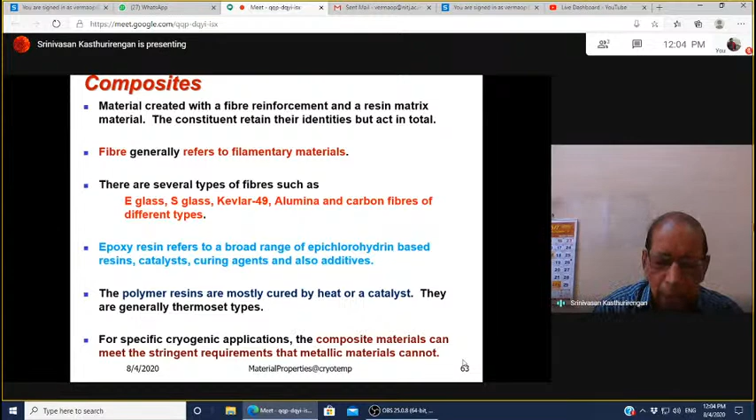For specific cryogenic applications, composite materials can meet stringent requirements that metallic materials cannot. For other applications, composite technology offers improved performance and lower costs.

What are the advantages of composite materials? Lower thermal conductivity, high strength and stiffness, lightweight, usable down to 1.8 K, tailored structural efficiency, dimensional stability, close tolerance, improved insulation, corrosion resistance, minimum flaw propagation, etc. Well, there are so many advantages if you use them.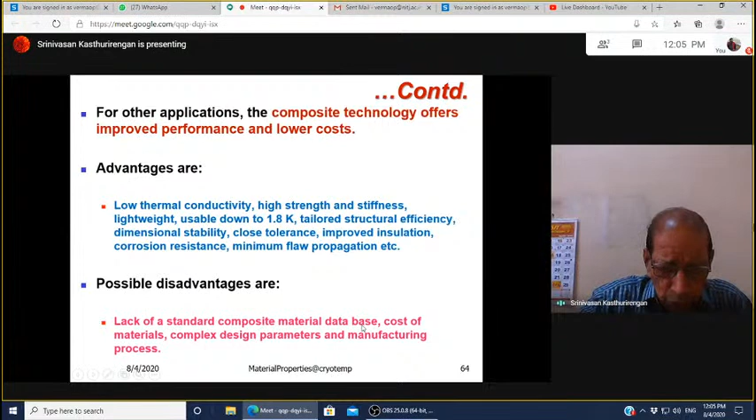But what are the disadvantages? First of all, there is a lack of standard composite material database. We don't know which one to choose, or where to choose from. Secondly, there is the cost of these materials and the complex design parameters and manufacturing process. So these are the things which limit our work in composites for cryogenics.

Let's move on to the fibers. Fibers provide the primary load carrying characteristics. I think you people are well aware of many of these things because many people are working on composites, so this is just an introduction.

to those who do not know much about composites. Several excellent fibers are available. Quantitative data at cryogenic temperatures are not available even now. If you take the tensile strength of a fiber, it increases when used at 83 Kelvin, or close to liquid nitrogen temperatures. It improves by almost 54% in the case of E glass, and by about 80% in the case of S glass, starting from their room temperature values.

What about the costs? Cost wise, E glass is the lowest, then S glass follows, then medium strength low modulus carbon, then Kevlar 49, then high modulus carbon. The costliest is the alumina fibers. Other carbons are in the intermediate price range.

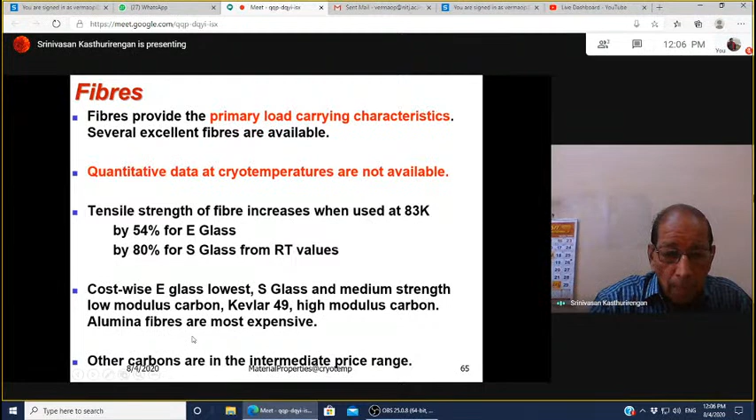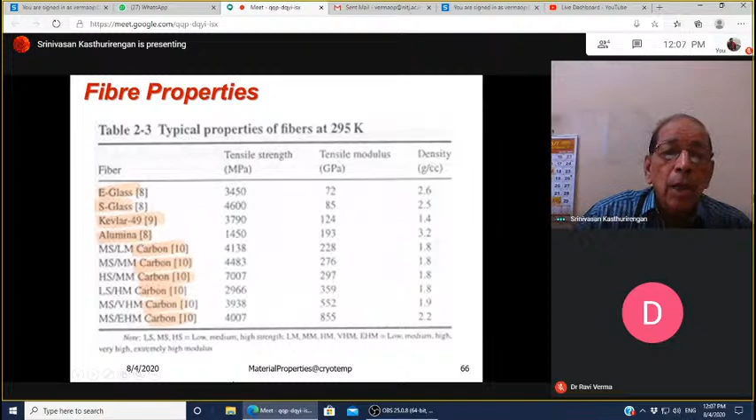I don't know how good this slide looks in front of you, it's not very clear, but anyway, this lists the properties of the fibers at 295K. We study here the E glass, S glass, Kevlar 49, alumina, and then carbon-based fibers. The data shown is tensile strength, tensile modulus, and density. These are the parameters shown, and as I mentioned, you have various values for this.

Now let's come to resins. The resin binds the fibers in the proper position, distributes the load between the fibers, protects them from abrasion and environment, and provides interlaminar shear strength. The elongation to failure of most of the cured epoxies are quite low, hence they provide good cryogenic performance and structural integrity, and cost-wise they could be minimal. Epoxies are found to be better than polyesters in resisting moisture and environmental conditions.

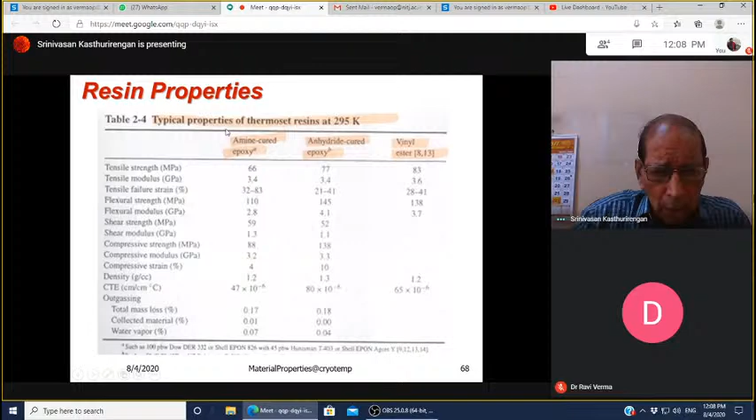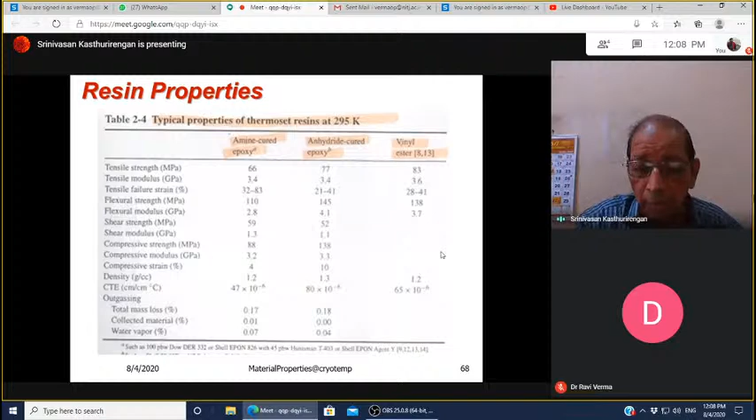Some properties are shown here, actually mechanical properties are found to improve. For example, typical properties of thermoset resins are shown here. Again, I'm sorry for the quality of the slide. Amine cured epoxy, anhydride cured epoxy, and vinyl ester are the three resins shown here. The properties shown are tensile strength, modulus, flexural strength, shear modulus, etc., and then outgassing parameters, like how much gas output comes from outgassing, etc. These are all at 295K, room temperature.

What about laminates? The cryogenic composites are typically fabricated by wet winding. Continuous fibers are embedded in resin, winding the pre-preg tape, laying up or forming the woven fabric, or injection molding thermoplastic resins containing discontinuous fibers. I think some of these things were shown in the video, you have seen actually how they fabricate.

The fiber placement is followed by some temperature or pressure curing process. The mechanical properties of such materials are shown in tables or some references. The tensile strength and other mechanical properties are generally found to increase at low temperatures.

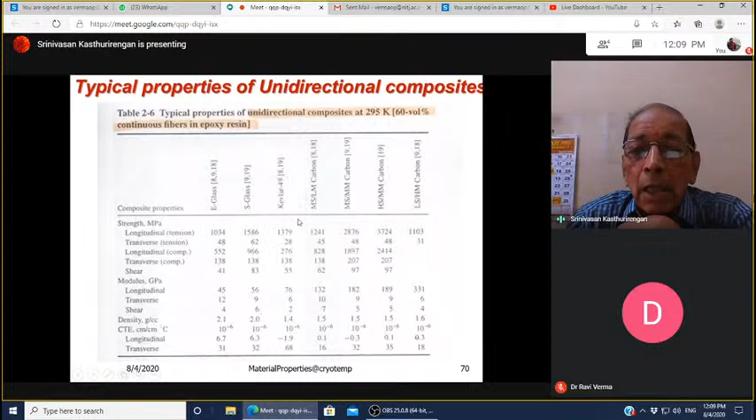Now the typical properties of unidirectional composites at 295K are shown in this table. You have 60% by volume continuous fibers in the epoxy resin, so you have E glass, S glass, Kevlar, and carbon-based fibers. The properties are strength, modulus, density, etc. All this information is given in this table.

Now let us look at the thermal conductivity and maximum stress that these composites can take. The values are shown for 4 Kelvin, 77 Kelvin, and 295 Kelvin. I'm not going into naming any of them, but in general, room temperature has a high thermal conductivity. As you keep going down in temperature, the thermal conductivity drops, with 4 Kelvin generally having the lowest thermal conductivity values. What about the stress, the maximum stress it can take?

Here the number of cycles to failure is plotted, and you can see the values generally improve for different fibers. For example, epoxies generally perform fairly well at low temperatures, and you can see the number of cycles are fairly large for medium strength low modulus carbon epoxy based at 295K. I do not know whether we have data at 4K... yes, there is data at 4K. For example, S-glass epoxy at 4K is shown here.

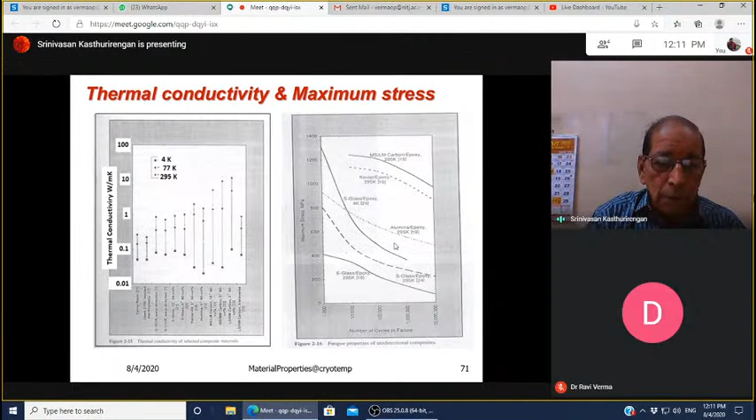Alumina epoxy at 295K is shown here. Most of the data is at 295K except for the S-glass epoxy, which is at 4 Kelvin. This data indicates that the performance is better at lower temperatures.

Cooling generally improves mechanical performance, but the data is very limited. The strength of G10CR increases by 100% and the modulus by 30% when you cool from 76 Kelvin to 4 Kelvin. The compressive strength also increases from 295 to 20K, for example 55% for S-glass, 27% for Kevlar 49, and 33% for carbon composites.

The filament wound composite material strength increases at least by 30% when cooled from 295 Kelvin to 76 Kelvin. So what this shows is that when you operate these materials at low temperature, the strength and mechanical performance of composites improves. Now, what are the failure mechanisms?

There are 4 basic fatigue failure mechanisms: layer cracking, delamination, fiber breakage, and fiber-matrix debonding. The fatigue strength depends on the basic materials, fiber orientation, composite quality, and the test specimen configuration you choose. Higher modulus fiber generally provides better strength, and fatigue performance also improves at cryogenic temperature, as we have seen in one of the tables earlier.

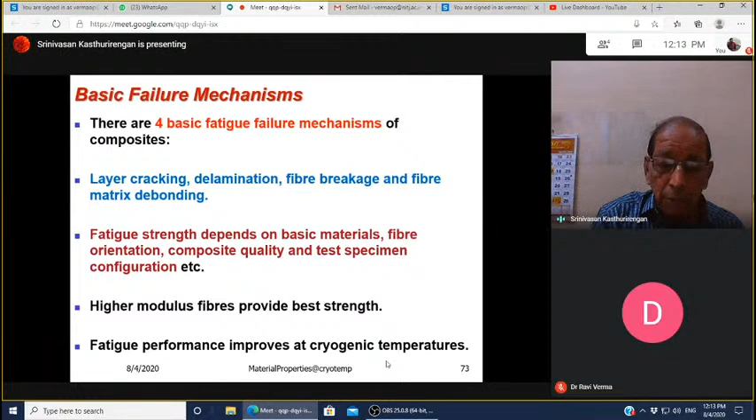How do you compare this with metals? You can compare it using ratio critical values. A low ratio of thermal conductivity to strength can improve system performance and reduce cost when composites are subjected to large temperature gradients. So composites certainly have an advantage when you have a large temperature gradient, in terms of thermal conductivity.

High ratios of modulus to density will reduce the weight and hence the loads on the equipment. For example, E-glass composites compare well with steel or aluminum. The strength to density ratio becomes at least twice that of steel and almost 5 times that of aluminum.

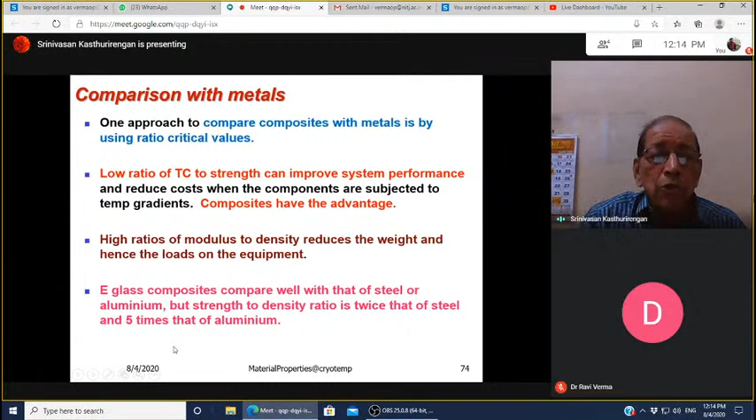What about application areas? There are many, I'm listing only a couple. For example, it's used as fuel tanks for liquid hydrogen instead of aluminum tanks. People have used it for reusable launch vehicles, liquid hydrogen tanks of 5 mm thickness, 2.5 meter diameter, and 4.9 meter height, carbon epoxy type tanks.

GRP type composites are used for support and insulation of liquefied LNG tanks. They are also used as support in vacuum insulated LNG fuel tanks of trucks, buses, and trains. Filament wound straps provide structural support and thermal isolation of cryostats and superconducting magnets. Composite straps are used in MRI, magnetic energy storage systems, also on the space shuttle, Hubble spacecraft, cosmic background explorer, etc.

Nested tubes allow use of glass composites between ambient and 76K, and carbon composites below 76 Kelvin, to optimize thermal performance. Fermi National Lab, for their superconducting dipole magnets, used reentrant posts developed out of G10CR nested support tubes.

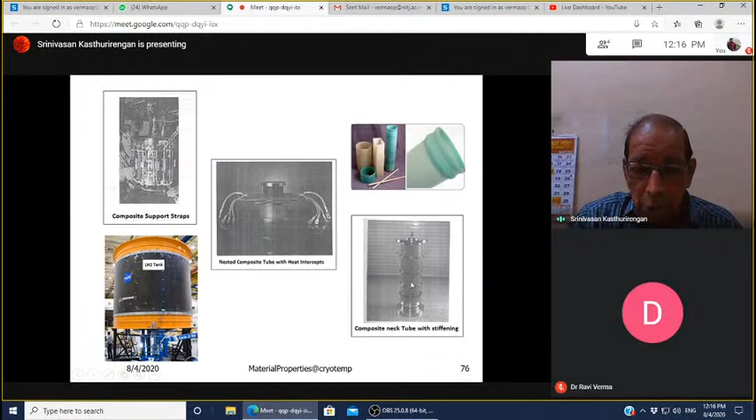I think I have come to the end of my talk. There are a lot of sources of data on cryogenic properties and materials available: a reference guide of cryogenic properties by Weisend, Flynn, Thompson, etc., and the cryogenic material data handbook by Durham et al.

There are also computer codes generated called METALPAK and Cryocomp, which are available. So if you want to calculate directly what should be the length of the neck tube or the thickness of the shell and things like that, it can be used. There is also information available in the proceedings of the International Cryogenic Material Conferences.

Well, for the composites, I do not have much data because I am not a composite man. So I think I have come to the end of my talk. I thank you very much for your patient listening, and I hope whatever I presented will be useful to you. If you want to ask me some questions, please ask me, not in the area of composites, because I do not know much about that.